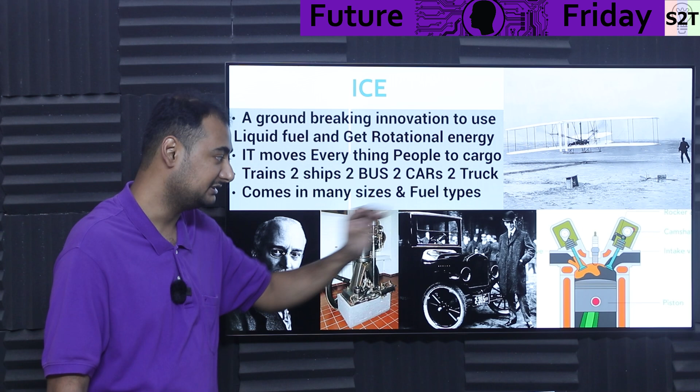Basically, we got our wings with internal combustion, not jet engine. Jet engine came way later. So this is how we started to fly. This four-stroke system is a very backbone-level technology for us. Be it Rudolph Diesel with the diesel engine, be it Henry Ford with proper mass-produced car engines, it is very important. A lot of people have poured a lot of soul and research into it, and now we have an internal combustion engine that is reliable.

So it moves everything from people to cargo, from trains to ships to buses to cars to trucks. And whenever you're talking about big units like giant cargo ships, warships, or locomotives, things of this big nature, yeah, they are not going anywhere. Let that be very clear. They are not going anywhere. I'll explain that further, but they are not going anywhere.

So it comes in many shapes and sizes, and also fuel types. For example, if your country dumps excess renewable energy into hydrogen production, then you have surplus hydrogen. Hydrogen for production simply means hydrogen consumed for industrial use, like manufacturing, food, metallurgy consumes a lot of hydrogen. I was shocked how much hydrogen it consumes. So we need hydrogen for those things.

But let's say you have some surplus, you can still put hydrogen gas into an internal combustion engine, or you can even carry liquid hydrogen, as Toyota did for racing, because you do want your race engines to be very loud and proud. So they took liquid hydrogen and put it into a combustion engine. Yeah, so you can do that. It's fuel agnostic, it does not care. You can put in jet fuel, diesel, petrol, ethanol. It does not care. By the way, somebody has actually built an ammonia-based engine too. So it really does not care.

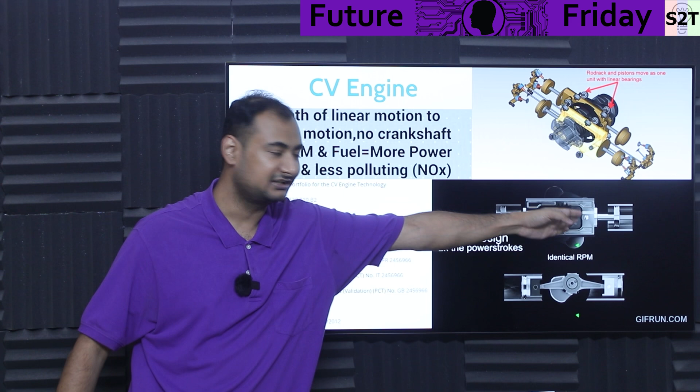Now here you have some limitation, because it's not lateral movement, and you also have chattering going on, so there is a limit to how much you can do. Here it's push as hard as you can, and that literally evacuates the other part, pushes as hard, evacuates this part. So it's very simple, so to say.

So less RPM, more power, and it has less pollutants also, because the amount of oil this will probably consume would be less. Again, you do not have a giant friction spot for the cylinders and all that. So there is serious potential here for low NOx emissions and all that.

Because many times people will say against biofuel that while biofuel fundamentally removes the carbon dioxide problem, it still has emissions, basically sulfur dioxide and nitrous oxide and all that. And we try to suppress it by utilizing catalytic converters.

We try some tips and tricks to take care of it. So here, if the fundamental engine, the core engine head, is not making too much pollutant, that is a good thing. These things can, in principle, clear the emission regulations without a catalytic converter. Adding a catalytic converter just makes it cleaner, don't even worry about it, it's pure clean. So on principle, let that be clear.

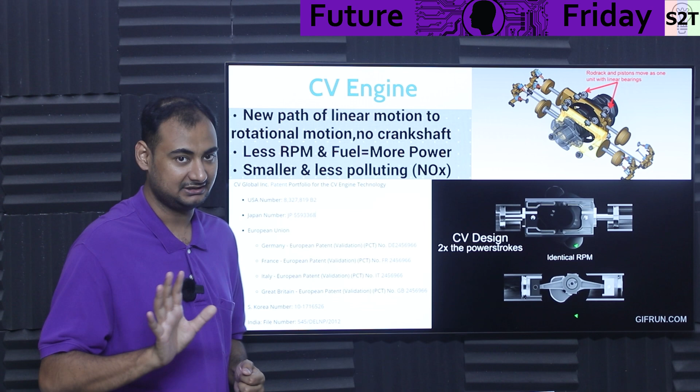Now, what about the patents and all that? Yes, they are loaded in that department. There's a US patent, the website I will link in the comments, you can check the patent numbers and all that.

So US patent is there, Japan patent is there, Germany patent is there, France patent is there, Italy, Great Britain, South Korea, and India. So yeah, they are loaded in that department.

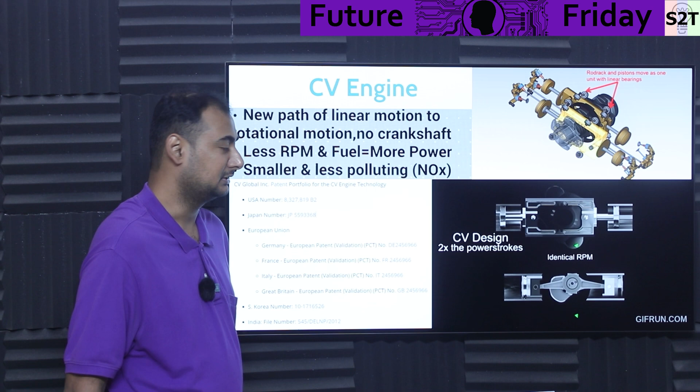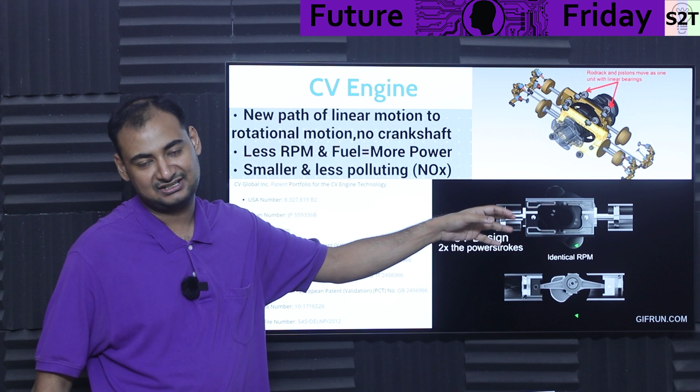So patent is done. This is the engine principle. Basically, you take the same 4-stroke principle, you just yeet the crankshaft, and you can watch the animation as much as you want. It's weird, it will look like, what the hell is happening? But just remember this, it's not a linear slide that is going like this, it's an offset slide. Again, it's one piece, but it has offset. That's why only one engages at one turn, another engages on the other turn. So this is the CV engine.

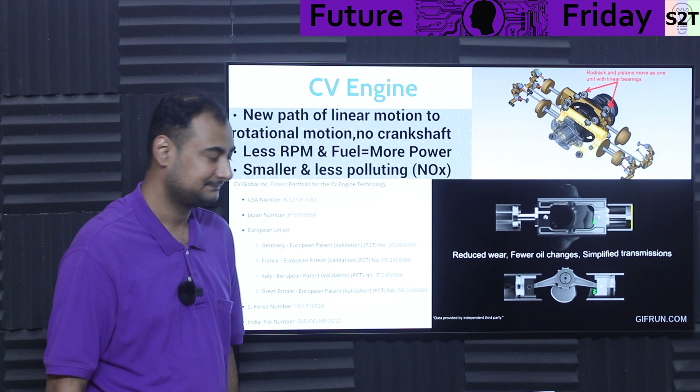Now the question becomes, why the heck work on combustion engine at this point? Well, if the predictions are correct, let's assume the predictions, what they are claiming, what their mathematics are showing, what small scale testings are showing, all those are true, it's going to be a significant progress over the normal conventional internal combustion engine. Combustion engines on paper are very efficient, but in the real world they are not. Now imagine something significant upgrade.

For example, my car claims a very large number, like kilometers per liter. I barely get 19 kilometers per liter. Now this is a tested metric, because I have a fixed distance that I travel, and the route is fixed, everything is fixed. Every few months I have to do that. So it's a fixed full tank to full tank. So I'm barely getting 19.

Now imagine that became 25 or 30, like a significant upgrade. People will simply say, shut up, take my money. And because of the amount of internal combustion engines that are in active use at this point in time, it's significant. If you can improve it, that will drastically reduce the emission problem that we are dealing with. It will not eliminate it, but reducing it is better than doing nothing.

And I'll talk further about why a battery system could not just poof all the problems away, even though we have been trying for 20 years. I'll explain that further. So if there is a significant probability of improvement, not doing it is harmful to the planet. Because again, there are reasons why you cannot just yeet the internal combustion engine. People have been trying for almost a quarter century. So there is a reason there.

And in terms of electric vehicles, there is a great advantage you can have. You can have a very small range extender. Imagine an engine that is very efficient, very small, very compact. And what does that mean? That simply means it's a small thing that you can put in your trunk. Right now, electric vehicles say they have like a frunk and trunk. What if they no longer have the frunk? They just have a range extender there.

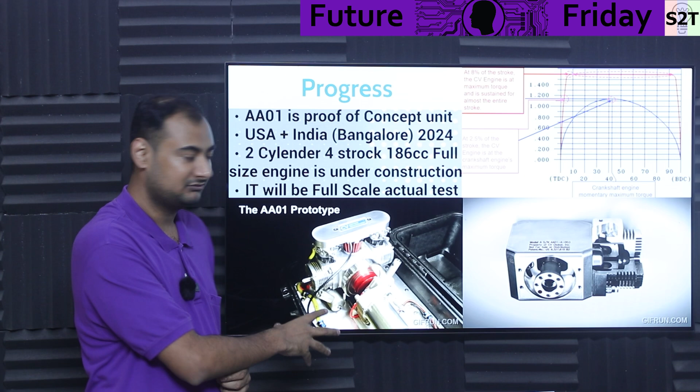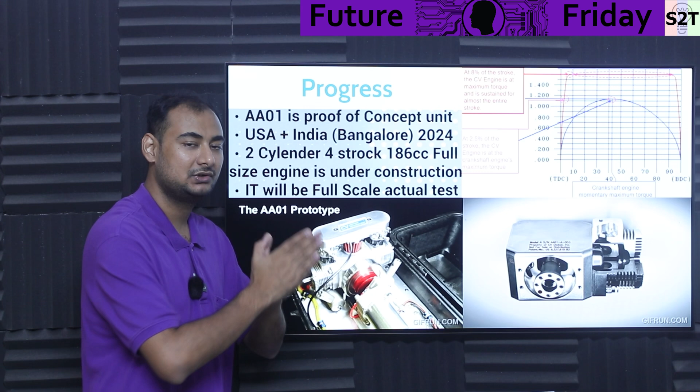I'm pretty sure you've seen hundreds of YouTube shorts with weird mechanisms. The question becomes, is it actually real-life suitable? So this tabletop model was a proof of concept where it's like, does it actually work? Can this system of sequence work? It did work. So at this point, proof of concept has been done. It does work, we can scale it up, we can try the next big things.

So now there are two players at this, USA and India. In India, specifically Bangalore, they're building the physical unit that will be used for a vehicle, basically a three-wheeler. The reason is it's a two-cylinder, four-stroke, 186cc system.

Now, like, hey, that's too small. Yeah, auto doesn't require a lot, and given the conversion efficiency they are hoping for and the torque improvement, it should be more than enough. And again, this is the primary target of this prototype, this two-cylinder, four-stroke prototype.

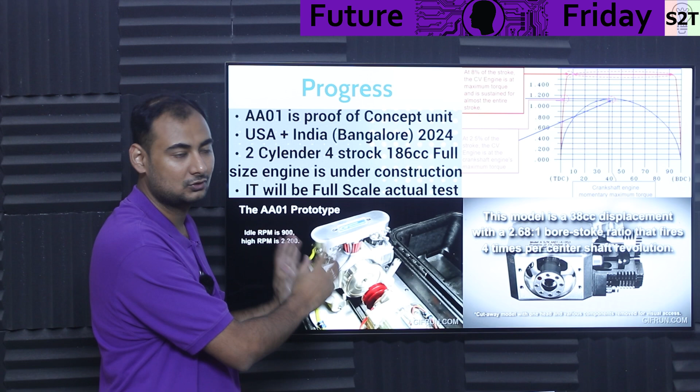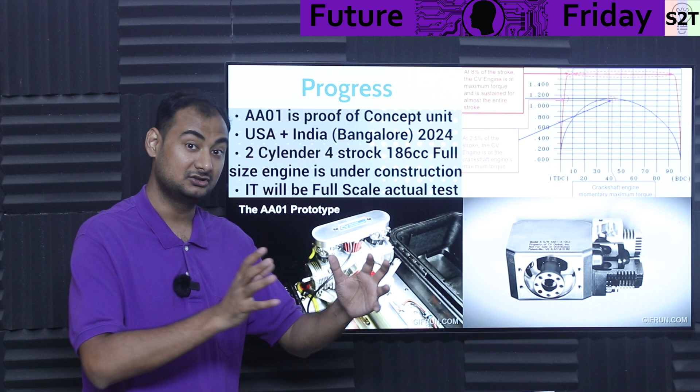It's very simple: does this work under load? This is good and all, this proves the core concept, but does it still work under load? That's the next big step. So that's what they are working on right now. As of now, when I'm making this video, this should be done in a few months. Hopefully, knock on wood, before this year is out, we should have an actual vehicle running on this, at least figuring out what works or what doesn't.

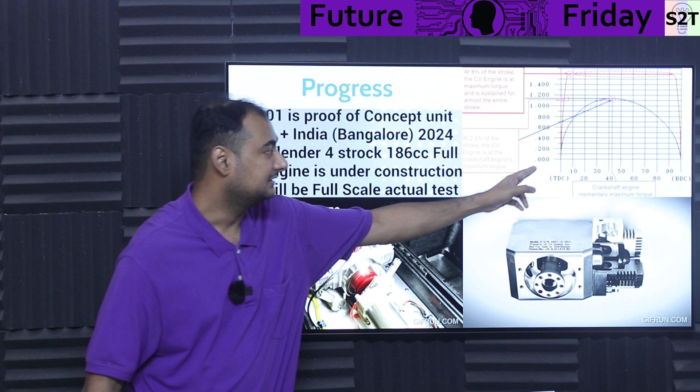So that engine is under construction, and it will be a full scale test. They have prototypes, small tests, and the idea is that you're going to achieve that crank roll-off, so to say, will become flattened, and that will also improve the gearbox, meaning we will no longer need multiple gears. Well, a few gears should do the job. So that's the progress we are expecting right now.

So it's no longer, oh, somebody made a design, somebody made a YouTube video. No, there are companies working on it, and some other OEM companies have shown interest, saying, yeah, we would buy that if you prove it could work. So there is a serious amount of interest.

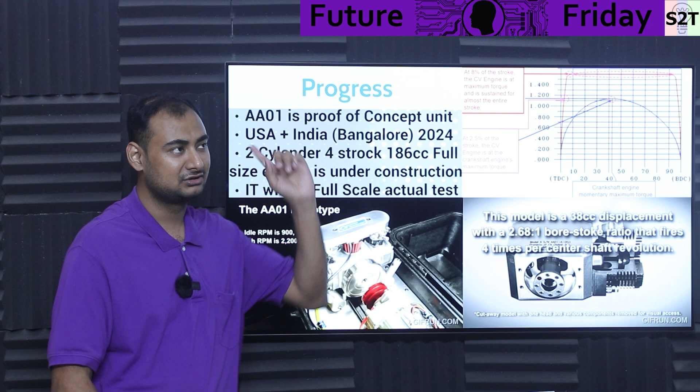Because be mindful, there's only ARM and x86. There is nothing else, think about it. Now you'll say, oh, there's PowerPC for IBM. When was the last time you used a server or a computer that had that? It still exists, it's real, it's just that good luck finding it. So that's the whole point: there is a very serious hunger for new technology and a new efficient engine. Shut up, take money.

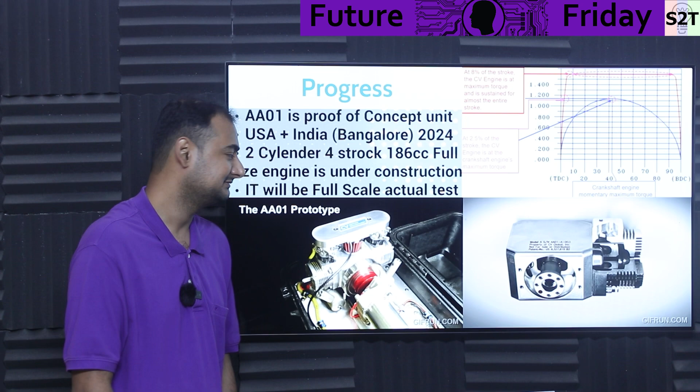So what can we expect in the future? Well, the reality is the R&D that is going into combustion engines, it's not going anywhere for a while. Now, what is this while? Let me define it: bare minimum 50 years.

Now, the primary reason why battery vehicles did not take over as quickly as they should have—think about it, how the marketing was 20 years ago. It was like, the new millennium has happened, battery systems are happening, global warming is happening. It should have worked. Why the heck did it not work? Well, the reality is we did not do this right.

Somebody looked into F1 and looked into the parallel hybrid model, and that's what they released the first time. Those were the first vehicles released, and they were so messed up. Again, inherently, they forgot the first rule of engineering. It was not KISS, they did not keep it simple, silly. It was super duper hyper complex.

Many of the hybrid models that Toyota, Honda, Chevrolet, and whatever other brand released, they had clutch packs on an electric vehicle. You have freaking clutch packs. And here's the deal, this is how you should have done it.

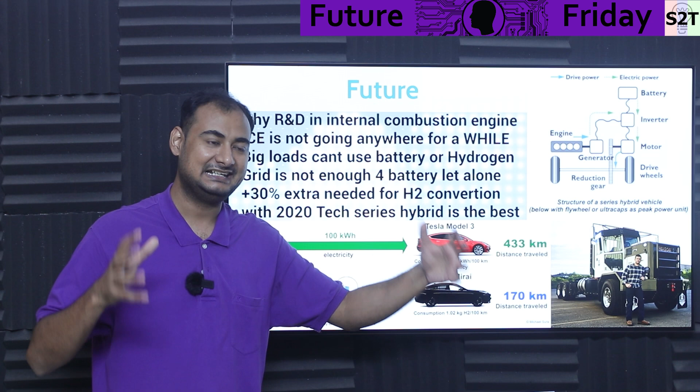What this gentleman did, I am very happy about. Basically what he did is like, hey, let's take a diesel electric locomotive, which has been running for almost a century, and just put batteries in front. That's it, nothing else. You take a diesel electric locomotive, you just put batteries in.

That's what he did. He built this truck, got it Canadian government verified before Elon Musk promised his delivery. He actually put money down to get a truck, and then because he's an actual trucker, he was like, hey, I would not do this like this. And he complained, and people said, if you think you can do better, do it yourself. So he did it, he built it.

Be mindful, that's the exact same thing that is done for submarines. So I have no idea how people got so caught up in this F1 frenzy, because F1 has the same system where you have a combustion engine with what we call a kinetic energy recovery system. It's basically a motor generator unit connected to the crankshaft itself. And nowadays they have a thermal energy recovery system, a turbo energy recovery system. It's so complex, it requires an engineering team working 24/7 to get that working.

And they wanted to put that technology into the Volt. People say, yeah, it did not sell. Of course it did not sell, of course it contributed to bankruptcy, because it was a very overly expensive car that did not turn as much profit as it could have. Why? It was not simple, it was complex.

What you need is an engine that is floating. What does that mean? Do not connect it to anything that has changing RPM. You take the engine, you couple it to a generator. The end. There is no vibration coming from the crankshaft, there is no different load coming from the crankshaft. You have a generator, it just runs at one RPM, one torque loading.

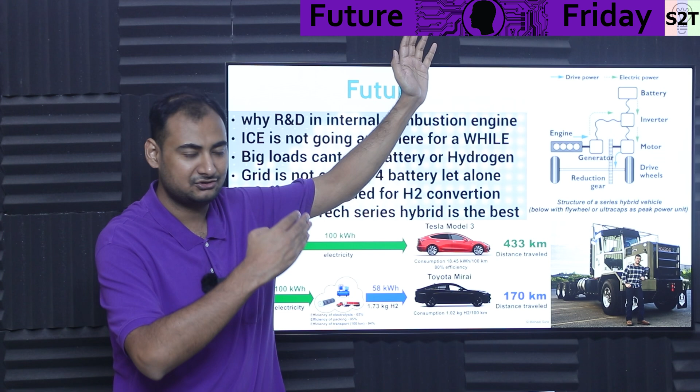So you have an engine, you have a generator, the generator feeds the energy to the inverter, and the inverter figures it out. If the person is applying brakes, it sends the energy to the battery and regens to the battery. And if the person is accelerating and exceeding the energy draw that this generator can provide, it drains from the battery. Super simple, no clutch packs needed, very simple, reliable.

Be mindful, we have been doing this, and this gentleman did it before Elon Musk promised it, and that's why this is the best system we have. This is super easy. You can just go to a car company and say, hey, make this, and your car will literally go from mileage, like in my case 20 kilometers per liter, to almost 35 kilometers per liter, almost double what I can get.

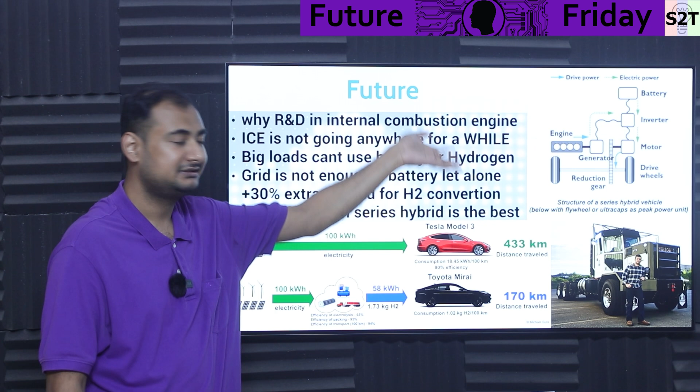Much lower efficiency needed, and again most of the time it's small, short range transport. I'll just charge it at home, and even when I'm traveling long distance, I'll still get the benefit of regen. At that point, let's say it's 100 kilometers and I have to travel 400 kilometers, the first 100 kilometers was on electric. So flat out, internal combustion is here, and it's going to be here for a long while. Do not worry about it.

It's very easy for a company to claim they're going to build an electric truck that can move a legal container without any issue. Awesome. Then you ask, how long will it take to charge? They say, it will charge in less than 1 hour. Whoa, awesome. Then you ask, what is the charging power requirement? This is where people break.

They just say it's a 2 megawatt fast charger. Bro, small villages run on 1 megawatt. Let that sink in. 1 or 2 megawatts is not something you can just have in the middle of nowhere. Especially in Canada, it's not happening. Not in USA, not in Canada, not in Europe. Barely in China, barely in India.

We have population density, so it's happening there. But it's not that easy to just have that much copper, that much transmission line, that much substation, that many transformers. Lol, we're just gonna have like... and that's one truck, by the way. One truck. The amount of energy these trucks consume is significant.

That's why we rely on internal combustion engines. We talk in horsepower, but we should move to kilowatts so people have far more context. It's a lot of energy. Like a lot. You're talking about 250 kilowatts of energy, which is the transformer rating for this whole block.

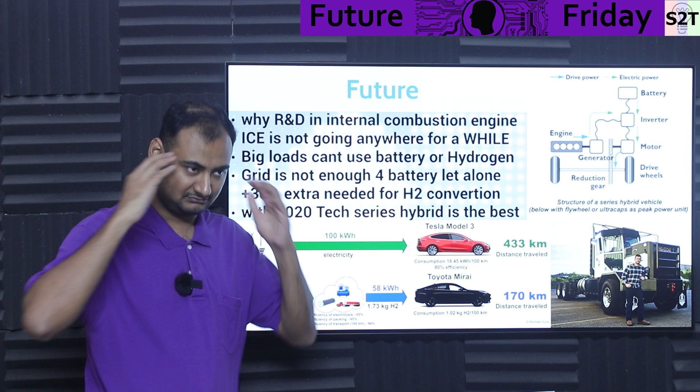Flat out, this removes people's thinking. It's like, where is the hydrogen coming from? The only way to have this without any grid downfall is running it on methane. Basically you are doing steam reforming. At that point, might as well use the methane directly, it will be far more efficient. So that's the issue here. That's the first problem: it's like, oh, it's not putting load on the grid. It is, it's just out of sight.

Another part is that it will be quick recharge. Thankfully, a lot of Indian companies including Tata, Chinese companies including BYD I think, and some Australian companies, they also have brains. What they realized is the big batteries needed for these sort of things will require a lot of energy to charge quickly, or small amount of energy for long duration. That's another way of charging it. Rather than speed charging it in 1 hour, if you charge it over 5 hours, that's much easier. For the grid it's like a minor inconvenience.

Heck, you can do it actually with solar also. So what they did is have trucks with swappable batteries. You get the efficiency without the penalty of long wait times. And again, you charge the battery in a controlled environment slowly, no issue. And it's far more cheaper.

So fundamentally speaking, we cannot just say okay, we're gonna have locomotives pulling giant freight trains on battery. Yeah, that's not happening. We're gonna have giant freight trains running on hydrogen? Yeah, it's gonna run out of hydrogen every few minutes. To give you context, diesel is 32 megajoules per liter. Liquid hydrogen barely touches 8 megajoules per liter. Compressed hydrogen at 700 bars barely touches 5 megajoules per liter. How the heck are you gonna carry it?

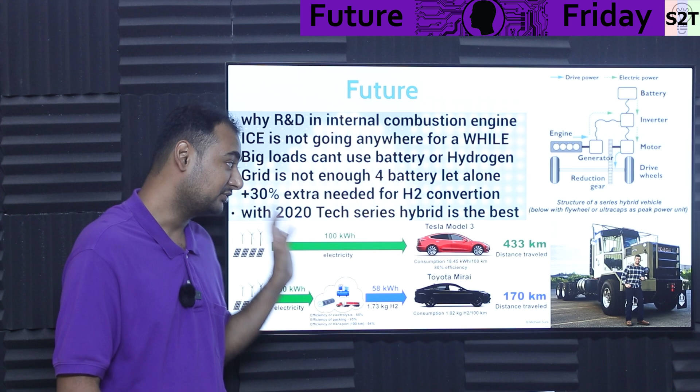So in 2020's technology, the best technology is this: short range, long range, this takes care of everything, improves the efficiency. But it does require an engine that is compact and lightweight so people do not notice it. This engine is a very good candidate for that.

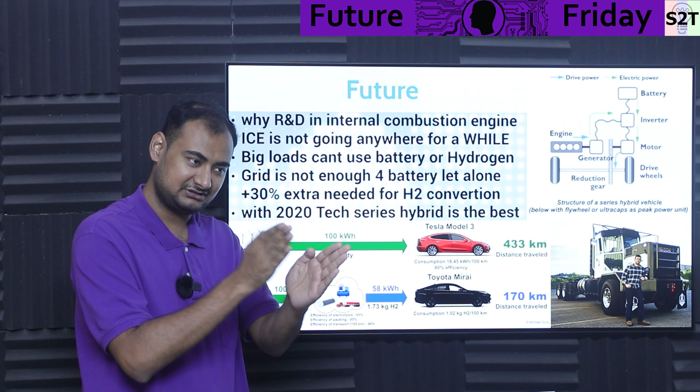We have to find the timeline and switch the gear, just a little bit. Look into the teardown of the Chevrolet Volt, it's like mind-boggling complexity. I'm like, no wonder this car failed. And now we are relaunching it. It's like we had a bad idea, then electric vehicle happened, that was again a bad idea, now we're going back to another bad idea. It's like, just do series hybrid.

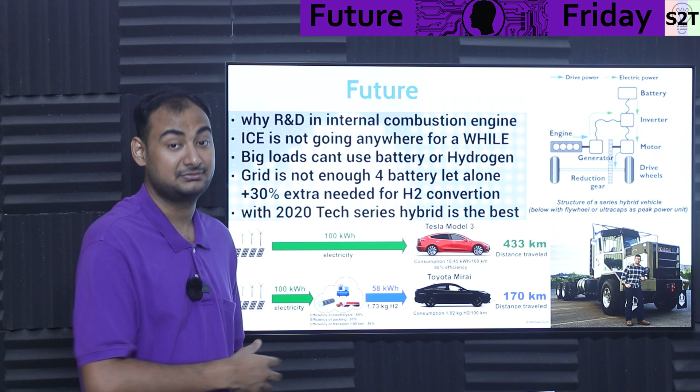So there is a lot of future left, let that be very clear. Lot of future left for the internal combustion engine. So we're gonna be here, and any company who cracks some new big things like this company is trying to, there is a lot of scope, more than enough scope of actually becoming successful. That's why I'm kind of excited, like something new is happening.

So this was my presentation on basically constant velocity internal combustion engine. Hopefully you have liked it, learned from it.